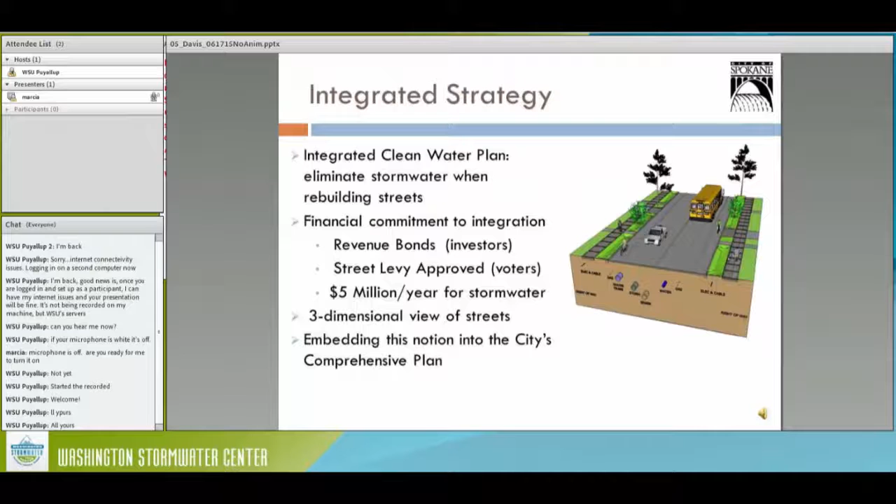So when we evaluated both our stormwater and overall our streets, our full public works for the city, we decided that we couldn't look at just stormwater or just streets or just our combined sewer, but we needed to look at those holistically. And that gave us the desire to do an integrated plan. With that, we decided every time we rebuilt a street, we were going to find a way to manage stormwater, whether it was in our combined sewer or our MS4 system. And so as we went forward, that became our basis.

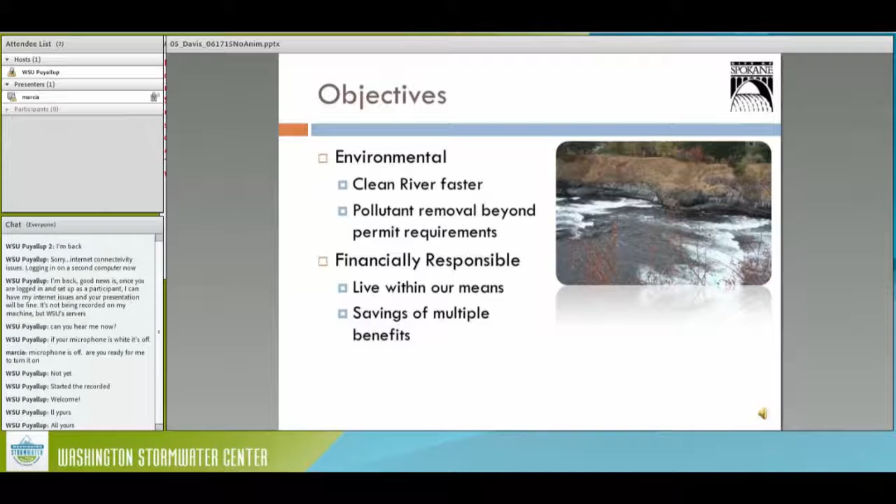So the two objectives we've gone forward with in our integrated plan, as goals as a city, are both environmental and financial. The motto we came out with for our integrated clean water plan was a cleaner river faster. And we decided we were going to remove the pollutants through every project, whether we were required to do it by a permit or not. But we also were committed to our citizens that we were not going to just raise rates without any pattern. So we are committed to only raising our rates to the consumer price index.

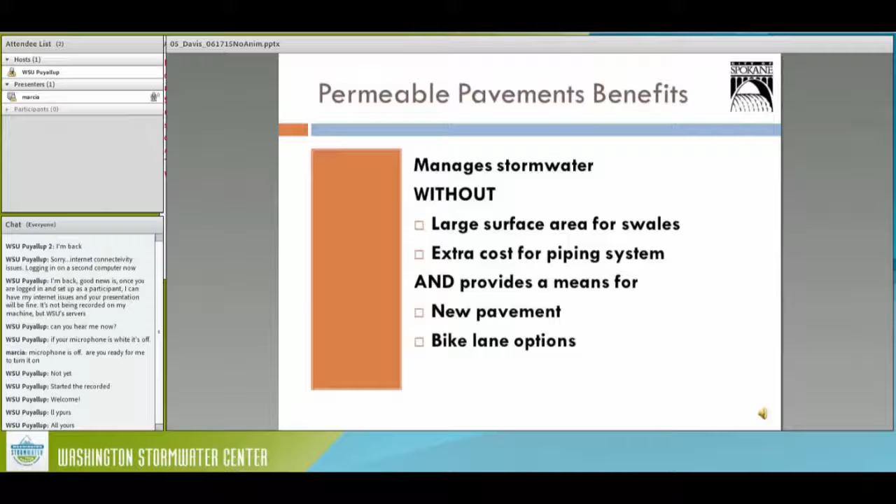So then when we started talking about permeable pavements, it was actually the management of the city that brought up the fact that using permeable pavements we could manage more than one problem at a time. We could actually manage the surface problem of being able to pave a street and at the same time manage our stormwater without having to do the pipes and all the catch basins and everything else that goes with a buried system. It would give us an option also for bike lanes or to add on to our transportation network and sharing that cost with stormwater.

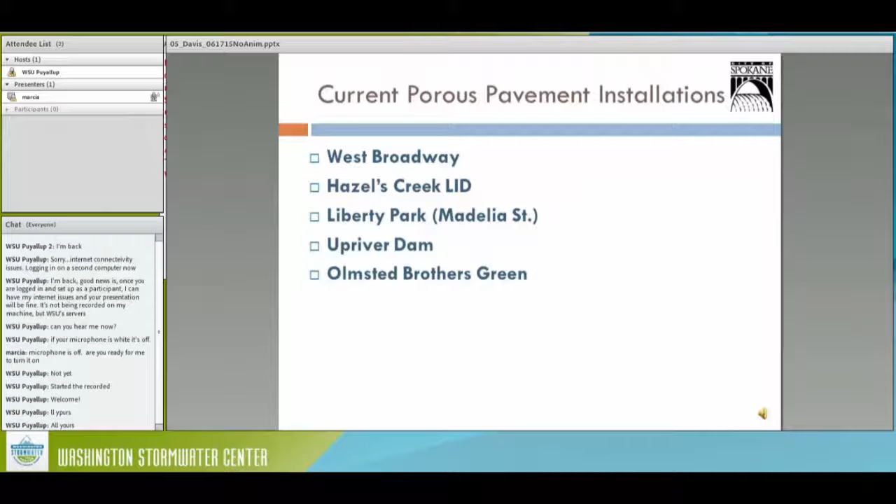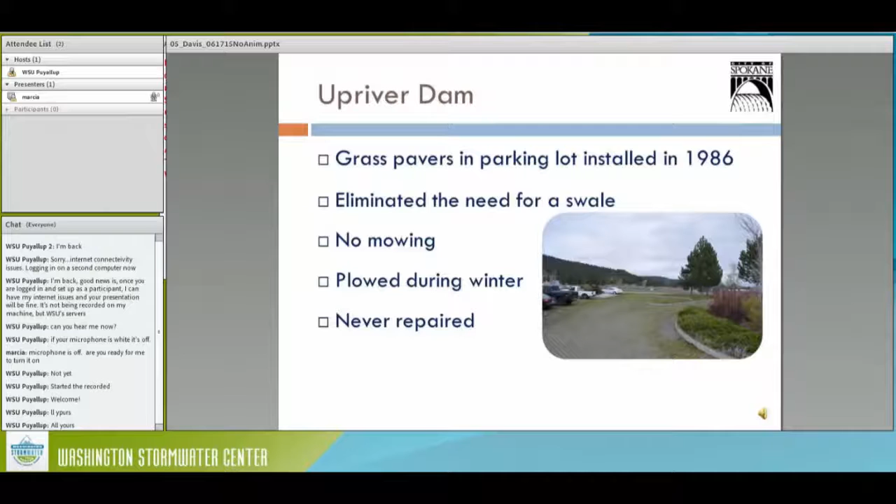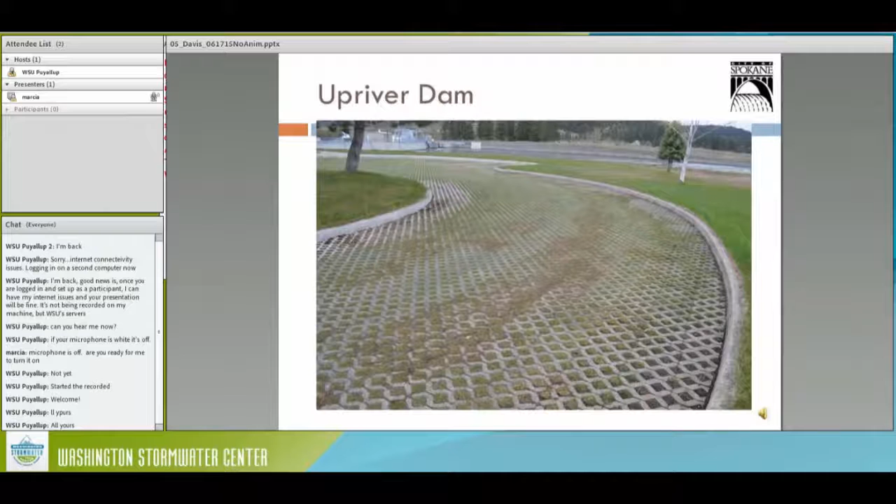But it has worked well. It has eliminated the need for a swale, and it has been plowed. It has never been repaired, and it looks in great shape. It's working great. So we've had great success with this. Now this does not get a lot of traffic. It's just those people that work at the dam, but it's been a perfect application for this.

The next project we tried was West Broadway, where our goal was to put in pervious concrete sidewalk. That was done in July of 2010. It turned out not to be pervious. We think during installation there was too much water in the mix. There was too much misting that caused it to make too much of a paste, so we couldn't have infiltration. Lesson learned there. It's really important to have your installers qualified and certified.

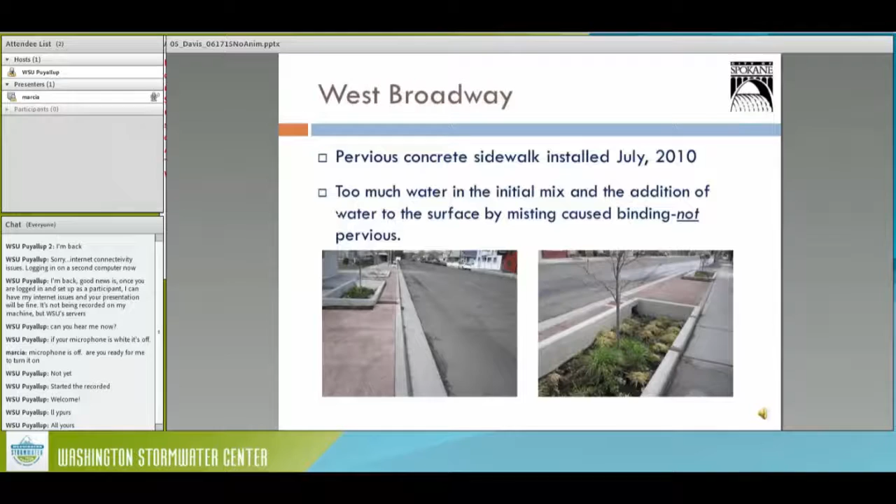So the next project, done about the same time or just right after that, was Liberty Park. There was a sidewalk piece. It was actually training for the certification for this pervious concrete application. And they asked if there was someplace in the city we needed a sidewalk, and we said sure. What's interesting about this is it does infiltrate. The infiltration rate is low, but it does infiltrate.

What's interesting is as you go from north to south, it improves, and so we don't know if that was because they got better as they went along and figured out how to do it, or did the mix become drier through the day? Those are things that are really important for installation that we found, that you really need to manage.

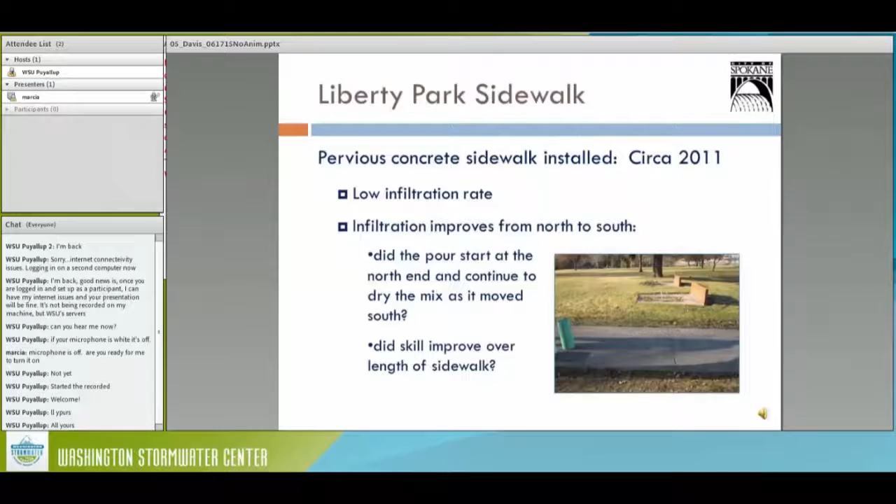And then the next one was Hazel's Creek. So we wanted to have a place that we could put these in, a place to test them and just see how they work. So Hazel's Creek has gravel trails, but we have these sections that are shown here in the circles. These are the areas where we put in porous concrete.

We did that. This area here actually has maintenance vehicles, so we wanted to see how it held up. And we go out every year to test it. You can see there's gravel. The areas outside of the circle are gravel, just to see what kind of infiltration rate we would get. And we found that the infiltration rate has decreased, but it's still infiltrating well enough to manage the stormwater.

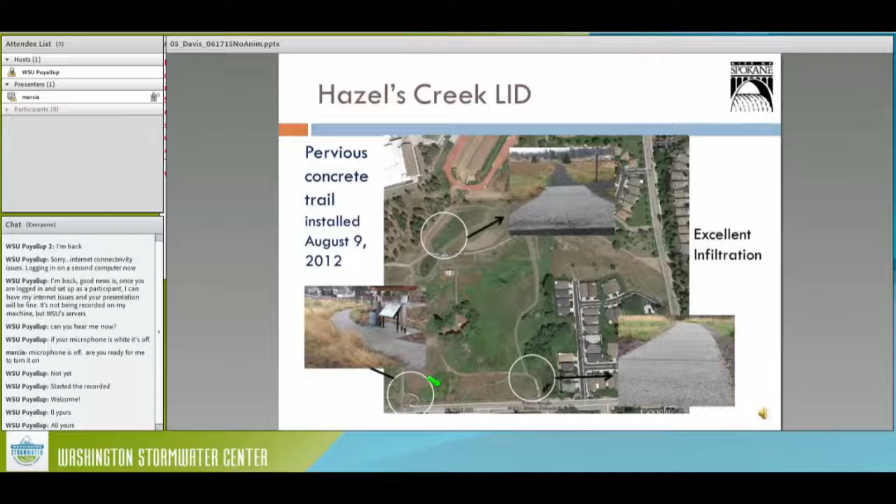We do find that on the edge where that concrete is next to the gravel, there's a little bit of raveling. And our next project was the Olmsted Brothers Green. We actually got a grant project to manage stormwater from one of our arterials, and the closest area that we could manage was about a half a mile away. So we actually have a force main that goes to this park.

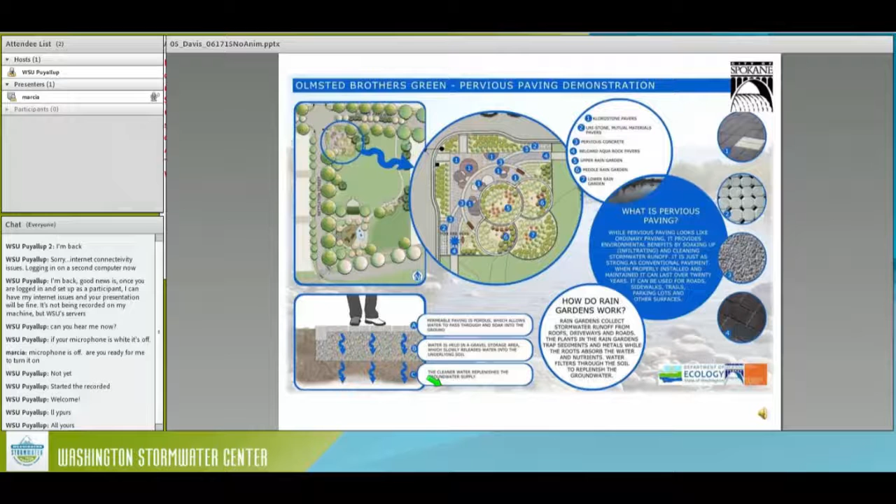So as part of this demonstration, we wanted to do several types of pervious pavement. And this is the interpretive sign you're seeing here that's showing the different types. We have three different types that we're using for that, plus we have a pervious concrete parking lot. And I will show you. So that was installed in July of 2014, and it's still working great.

This colored area, the dark colored area here, is a product called Klorostone, and it works very differently. It actually is like a sponge. It soaks up the water and then gradually releases it. The other ones here are permeable, that the water actually goes through it, or it goes through the gaps between the pavers. It's kind of a neat demonstration.

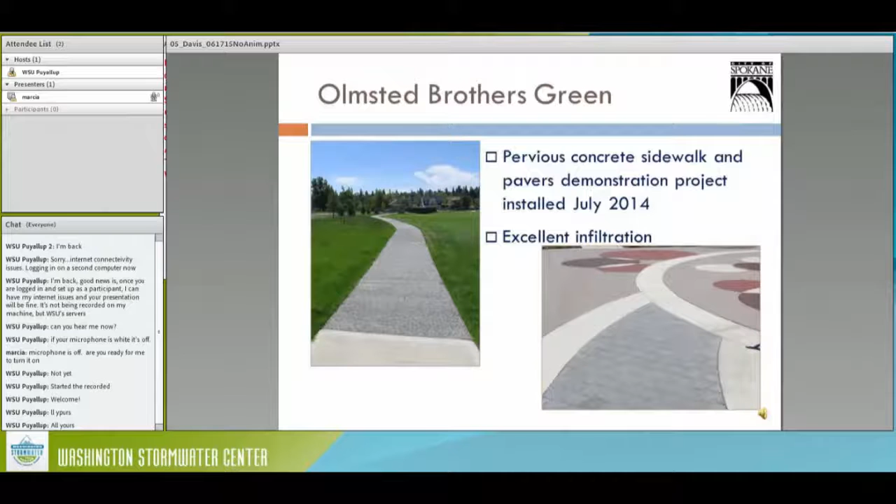And then over here, we have the sidewalk. And last time we tested that sidewalk, it infiltrated so quickly we had a hard time keeping up with the test. So it's working great. So we've had these successes. We thought, well, we're ready to try it in our streets. So we had four projects that are either in construction or planned to go into construction.

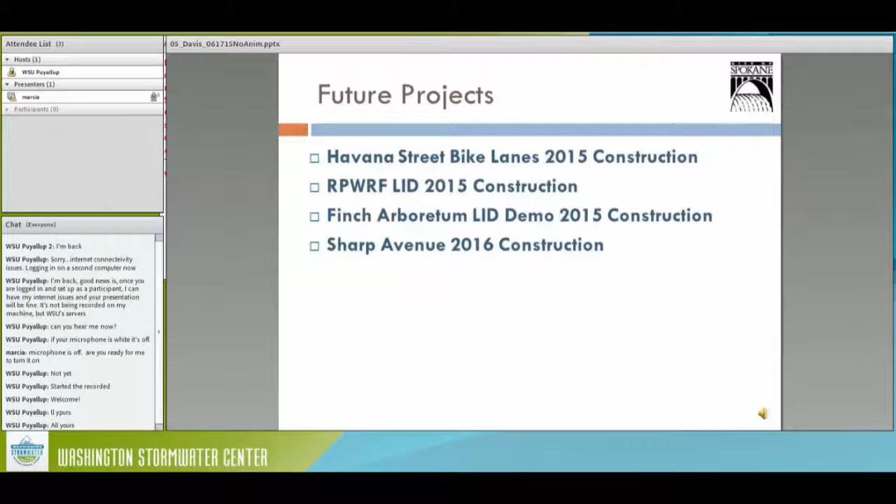On Havana, we decided to put in porous asphalt bike lanes. And then next to it we have a gravel area, because the engineering section was concerned that if it doesn't work, they wanted a backup plan. So we said, well, this has got great infiltration in this area, so we can put a gravel swale area, an area that we can infiltrate. We do show this with trees, but we're not putting very many trees in. We decided it really wasn't going well with the project, and there are no curbs.

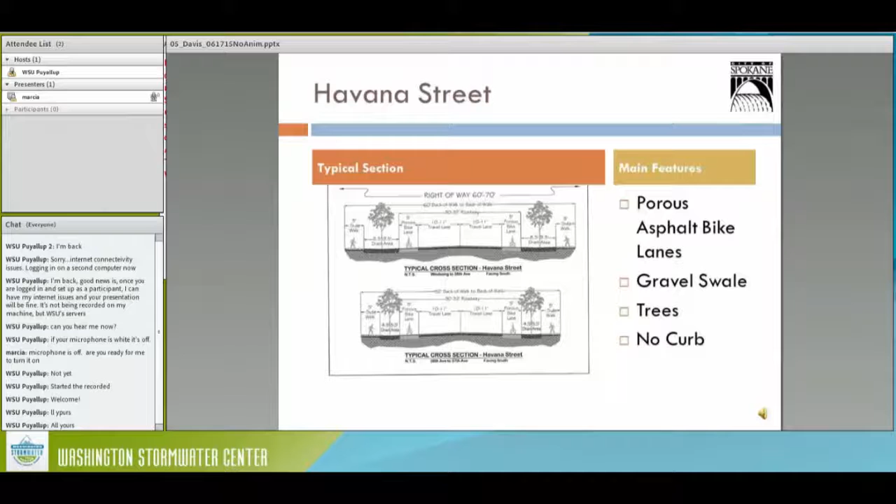So this is a great example of actually using porous asphalt within the right-of-way, not in a sidewalk area, and it will actually drain off of the travel lane into the porous bike lane. We're anxious to see how this works, to see if we get less freezing, less ice on the bike lane because it's porous.

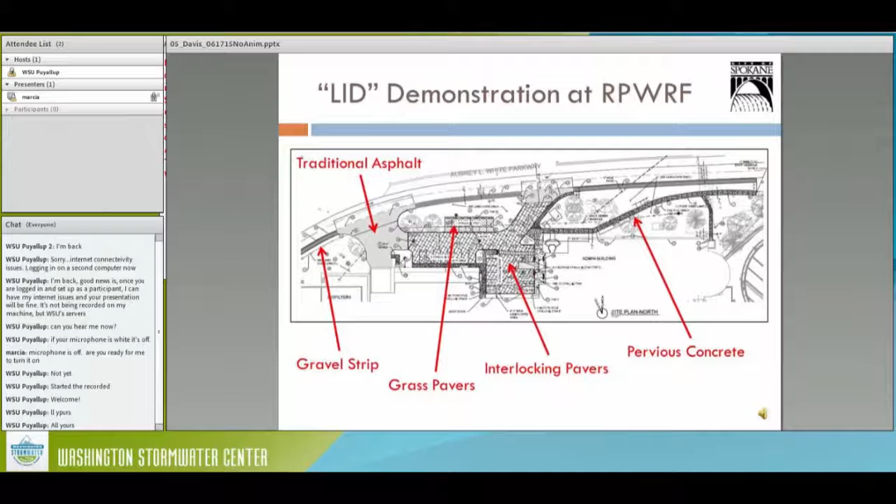So the next one here is Finch Arboretum. This was a project we actually planned about three years ago, and it's taken this long to get everything coordinated to build it. It's taking the parking lot and turning it into porous asphalt, and then we're managing some stormwater with an underdrain. WSU is doing some monitoring of temperature to compare the subsurfaces between the traditional asphalt and the porous asphalt, to see if we have migration of both flow and temperature. And the city will be testing to see the infiltration rate.

What was interesting is when the construction of this had just been completed, the operations people wanted to close it off so you couldn't use it in the winter, which is counterintuitive to what we want. We've got a lot of snow and ice, and we want to see how it's going to operate in the winter, see how well it's going to hold up. And we think we're not going to have to do anything different with this parking lot than with the one next to it. So, some of the more specific concerns we have in eastern Washington with permeable pavement.

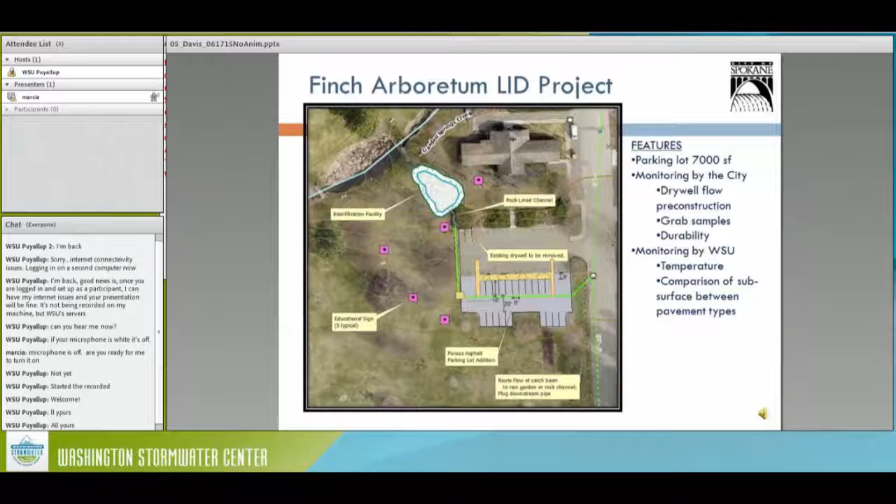One is dust, because the summers are dry and we get a lot of dust. But we're planning on using our street sweepers, the vacuum type, to see if they clean well enough. And the other concern, and I'll show you this on our next project, is Sharp Avenue. That's one we've been planning for a couple of years. We're starting design on that, and we'll be finishing that up at the end of 2016, early 2017.

In this one, the sidewalks are in great shape, and we decided we didn't really want to redo the sidewalks. But we find that we get a lot better results by doing the road itself, because it is going to manage more of our stormwater. Because we tend to have storms rather than just constant rain, although we do have that. Either we get snow, which gradually melts, or we get a more intense storm. Having the sidewalks is a small reduction, but not enough that it really makes a difference in any stormwater facilities.

So in Sharp Avenue, what we're planning to do is to have 3 sections. One, we're going to use some traditional asphalt with a center swale. In one area we're going to just have the bike lanes as porous, and then the next section will be completely porous. And we're also looking at doing a whole intersection in permeable pavement. We have several concrete intersections throughout the city, ones that have a lot of turning movement or bus traffic. We make them concrete for the durability. And this street, Sharp Avenue, happens to be adjacent to Gonzaga University. We have a bus route here. We have a lot of pedestrians.

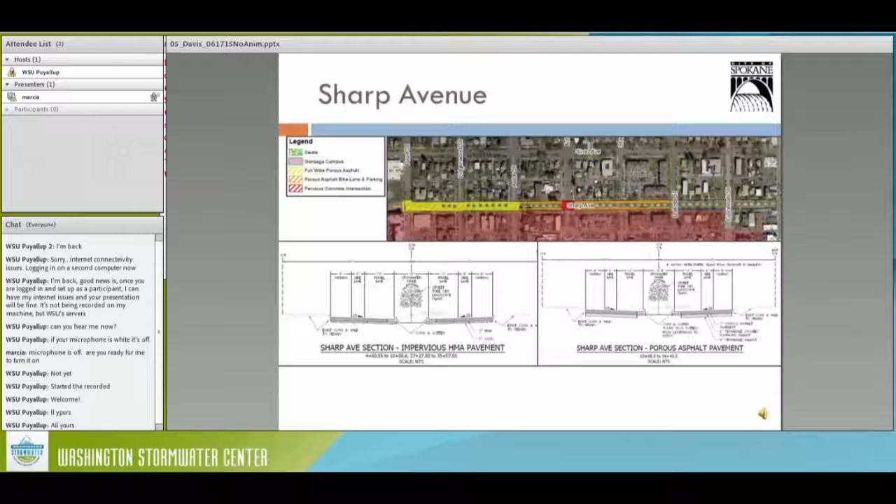But what we decided to do, once again, to have a level of comfort, because this is a new product, something we haven't done very much here. In fact, the Finch Arboretum I was just talking about was the first porous asphalt project the city's done. So we don't have a lot of a track record, so we are going to be regrading the street to have a center depression and have a swale there. So in case there's any kind of failure from plugging, and that's what we're imagining, or if a section gets a lot of raveling or other problem, we can use standard asphalt to repair it, and then it can drain to the center.

And here's just kind of the details. The 3 different sections have a center swale. We're going to have trees in that center, and we'll have bump outs for pedestrians, and those are going to be standard concrete. And the bike lane for that asphalt. That's also a parking lane, and there's some concern how that's going to hold up to the turning movements of parking. We'll be doing a little bit more research to try and find an asphalt mix design that can give us better durability for those turning movements.

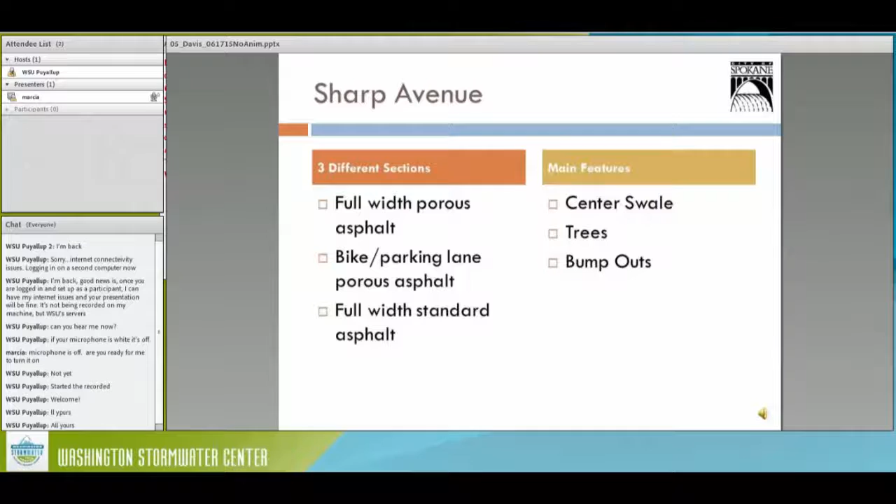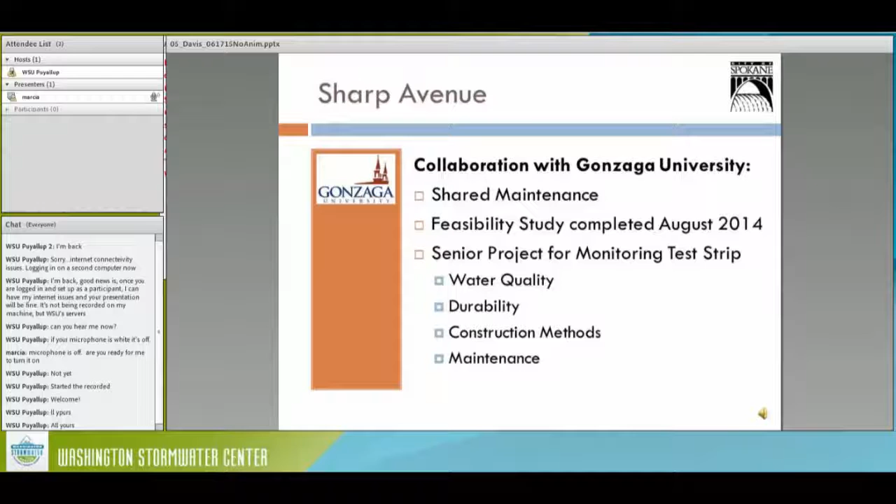We have been collaborating with Gonzaga University, and we will be monitoring Sharp Avenue as part of a senior project. They're designing the monitoring test strip and figuring how we're going to do that. For Eastern Washington, sampling for stormwater is a little bit of a challenge. We don't generally get storms that are several days, and a lot of times they happen at night or weekends. So being able to have someone available to come grab samples, and to have your equipment set up and checked so it's ready to operate when we do get the rain, is important. So they are working on actually doing a model of porous asphalt to see how exactly they can build the underdrain, and we're excited to move this forward.

So we have the monitoring system. We're going to monitor for water quality, for durability, and for maintenance. Those are the 3 things that are really important to us: being able to treat the stormwater, to hold up long term, and not to cause a lot of maintenance. At the same time, because it is right there on the campus, it'll give us a chance to have some low impact development education.

And that pretty much sums up what we've been doing in Spokane. Going forward in our capital projects, we have a few where we're considering porous asphalt and pervious concrete, just because when you get into a retrofit environment, sometimes that's the only solution to manage stormwater, to take it either out of an MS4 system or out of a CSO system.